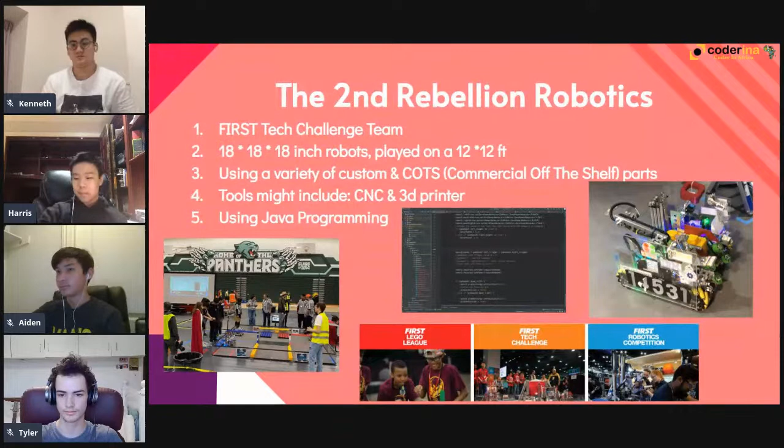So this is our engineering notebook. As Ken briefly mentioned, there will be another workshop about it. Right now I just want to mention how we use the engineering design process to successfully build a robot.

In First Tech Challenge, we do need to submit an engineering notebook, very similar to First LEGO League's engineering notebook. Starting from the top left side, there are sketches of our possible robot designs, where we need to start brainstorming ways to manipulate the objects. We use different methods to keep the best ideas, and then start on the CAD.

Lastly, you see images of competition bots with their descriptions. This is just to show how we have to describe how and why we built our robot this way.

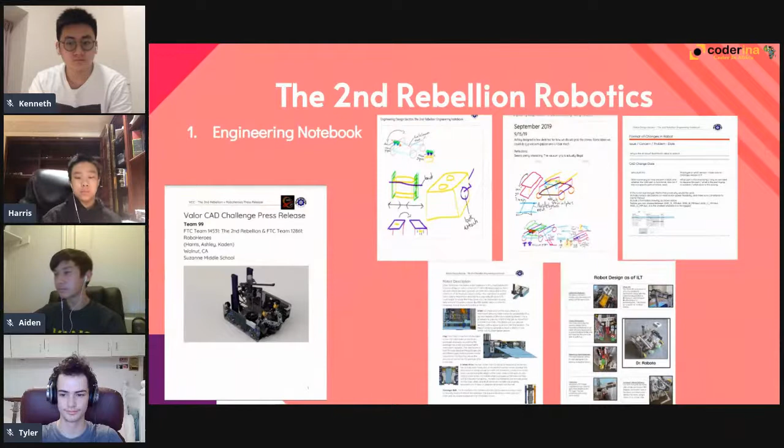We'll also show an example format for a basic FLL bot with the link provided if you want to build it in CAD. Lastly, we'll show a sample of how Virtual Robotics Toolkit links, but we'll go in depth next week since there are a lot of questions and intricacies inside Virtual Robotics Toolkit. And then we'll be looking into chat for any questions. Okay, next slide.

First on the list, we have Virtual Robotics Toolkit. It's a simulation program for a LEGO robot. Some features include the ability to pair up the motors with the software and then test the program directly inside the software, and make sure your computer-aided design model actually functions like an FLL robot and properly works.

Once you get into LDC, you'll see a similar screen to this. You go up here, click Preferences, LDraw, Search Library Paths, and you can see I already have it created here, but for you it's not going to be there. So you click New, and then click on the one that you've just created.

And then Browse Folder, and I have my LDraw download folder. It's probably in the same area, in local disk. Then you click on the entire LDraw folder, select the folder, and that's it.

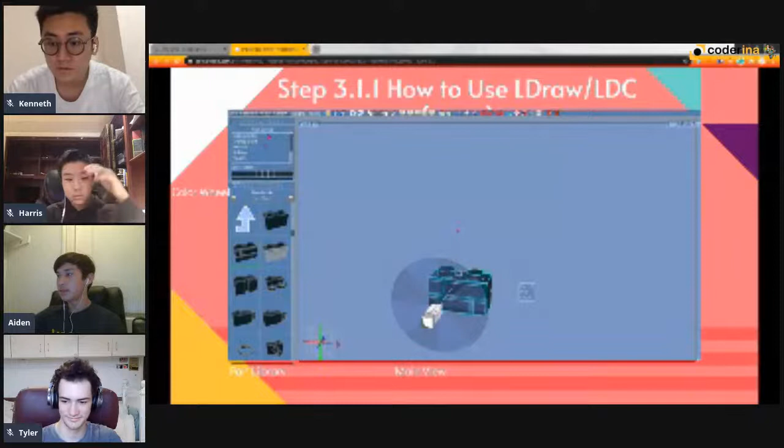So this is basically our LDC layout, or GUI. On the left side, top of the left, colors, and we'll go over a little bit more. Below you can see the library, which is divided into different categories, easily organized for you to go through. On the right side, the big box is where we actually are.

Aiden, I'm gonna have Harris share the screen. So Victory, can you actually change it to Harris for the screen? Hello. Slide. And over.

Do you see this? Hello, Aiden. No, it's not loading. Wait, Harris, can you hear my voice? Yeah, we can hear you, I'm fine, ready to screen share. Okay, I think your screen share is on there right now. I think Aiden, can you go back? Aiden's frozen. Is he okay? I'm just gonna... Aiden, can you hear? Aiden, you're lagging really bad. I think Aiden's frozen, so okay.

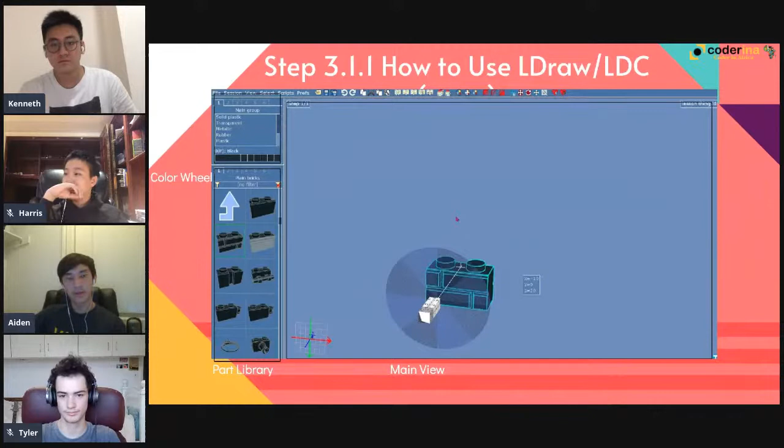So as you guys can see, on the top left is our color wheel, which Harris briefly went over, we'll go more in depth on that later. Below it we have our parts library, and each part is located in a specific folder, so it's very organized for you instead of like in real life where you'd have to organize all your parts yourself. To the right of that we have our main view, where you'll be building everything, where everything's being put together.

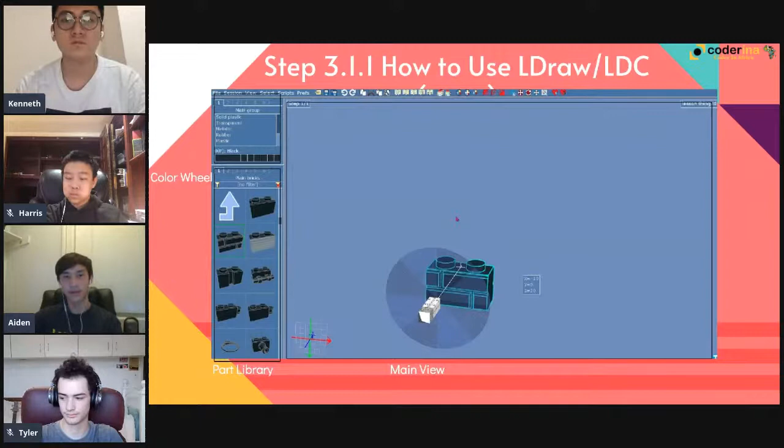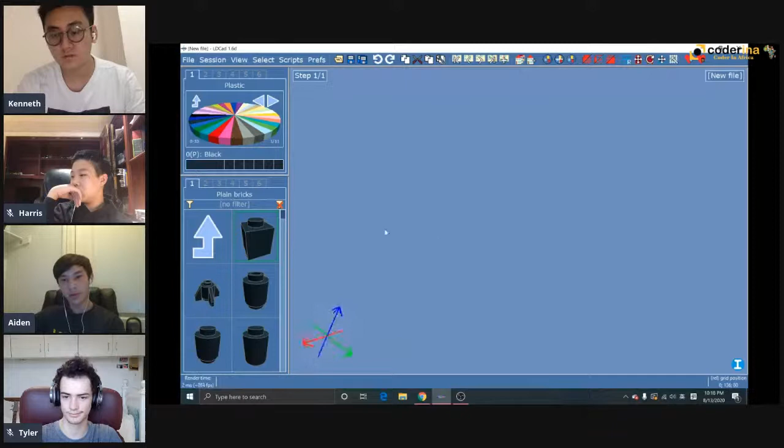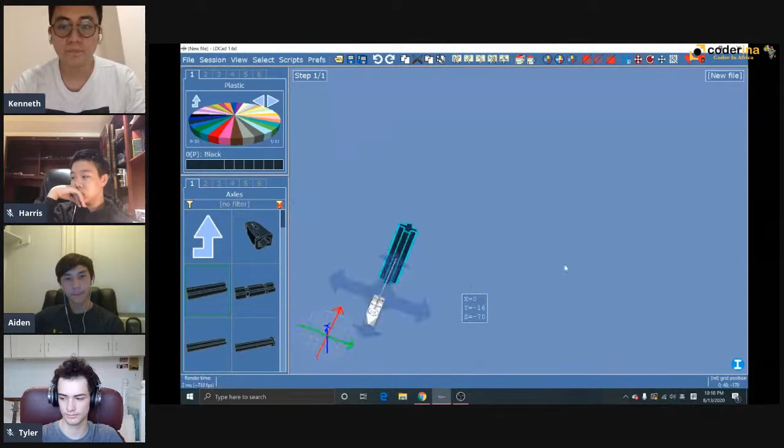To start a new project, click on Start New Model, and at the top it says Name, you can name it whatever you want. You can also add a description, but we didn't for this one. We have this graph thing at the bottom, and if you right click, hold and drag, you'll be able to move around your piece and view around it, choosing different viewing angles. This is just by right clicking and dragging. Another cool feature is in the bottom left, if you choose the one at the top, instead of moving around it, it will just move up and down.

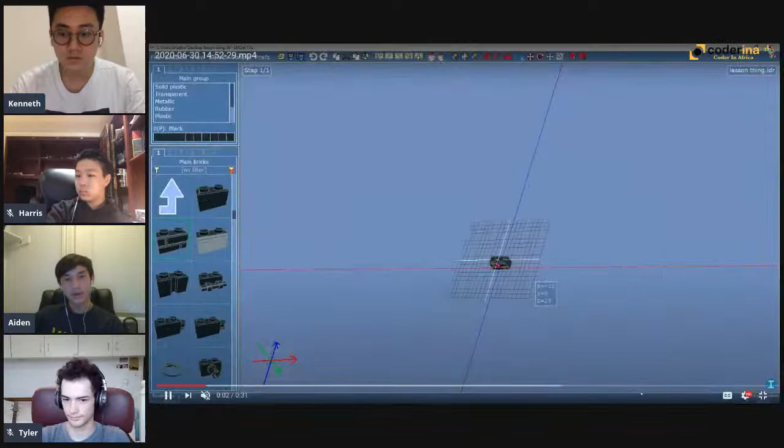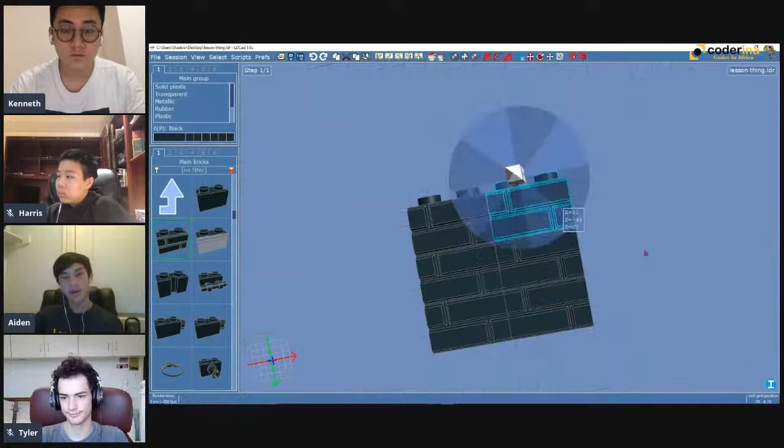Okay, so as you guys saw earlier, we're able to change the method of how we use the pieces. This is the grid method, which is what it defaults to once you download the software. Our pieces are automatically snapping together, but it's different from another feature called part snapping. This is basically where each piece is on a grid, and there are only a few specific places they can actually go, which is how they're able to snap together so easily.

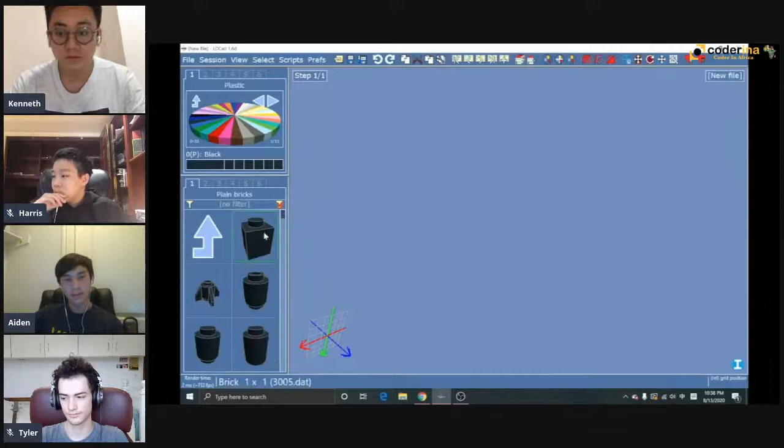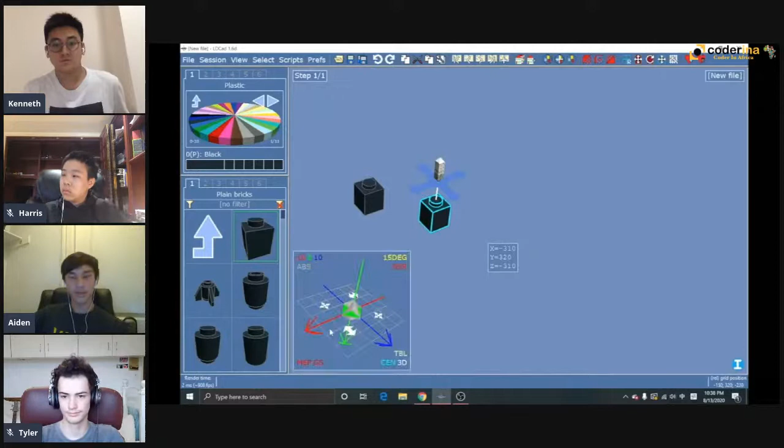Now this is part snapping, which you access in the bottom left. We go through our parts first and take out a piece, then go to the bottom left where you can see two important options. If it says enable or disable the auto editing plane, that means if you disable this you'll be able to move your piece freely without the grid, and part snapping will make it so once you go near a part, the piece automatically links to it like a magnet. As you can see, I'm able to move my piece freely, and if you turn off part snapping, it will not go to the other piece. So probably use either the grid method or part snapping to easily put your pieces together.

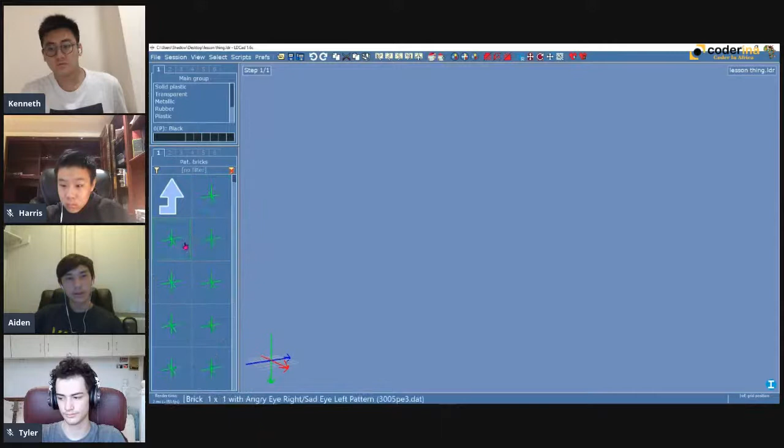Okay, so as you can see, we have our parts library here. And if we drag out a piece... So you have all of your different libraries here, but you might be wondering, where do I get to the FLL parts? That's on this gear.

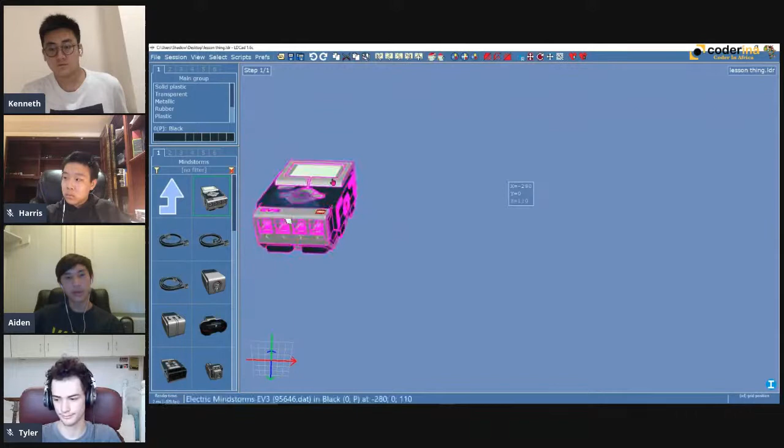So you go through here and you click on this gear right here. And that will bring you to, or no, you scroll down and you click on the EV3 brick. And it will bring you to this. So then you're able to drag out your brick, and this, as you can see, there's like a wheel here, and you can use this to rotate your piece.

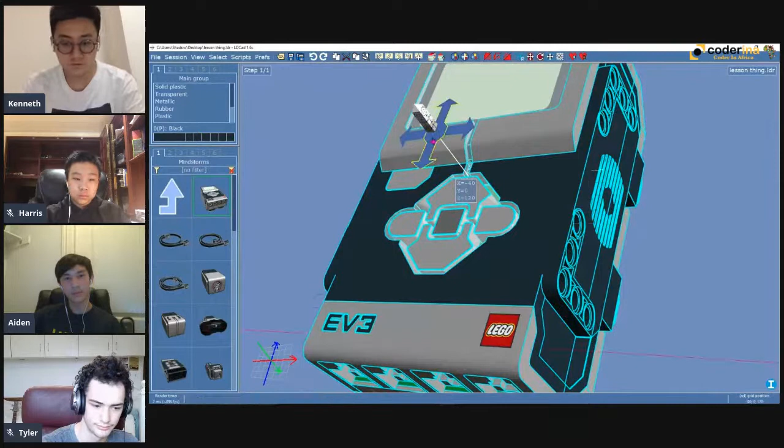And this is one of the key features in LDCad. And we have our rectangle here. So the middle one is able to be, you can move the piece up and down, left and right. And the bottom one in this little rectangle moves the plane. So let's say you want to move your piece to a different position without changing your viewing angle of the piece. That's very useful.

So next we're going to go over how to use submodels. And if you don't know what submodels are, or you haven't had experience with them, like in Onshape, Fusion 360, Inventor, or SolidWorks, which are other CAD softwares, you're able to create these things called submodels. Now, LDCad is different because it automatically groups the submodel as one part. Unlike other CAD softwares, submodels don't automatically update in a model.

So basically what submodels are is, let's say you have your drivetrain, which is like your motors and your wheels, and then at the top you want to have your brick and maybe some like an arm or something. So instead of building those two things on the same project, you can actually combine them into one, which can be pretty unorganized otherwise. So next slide.

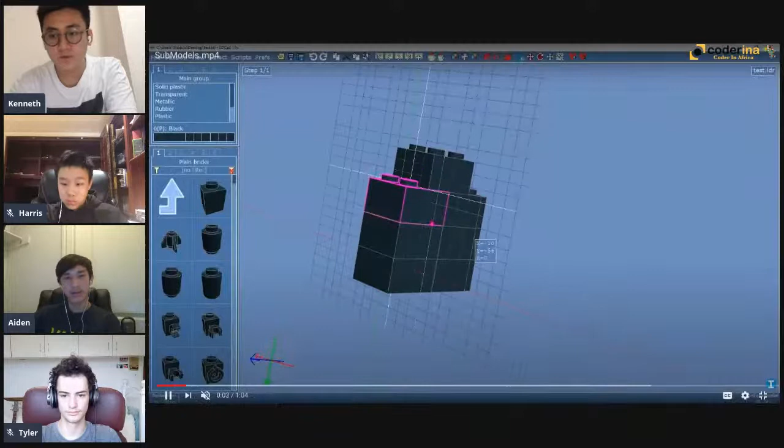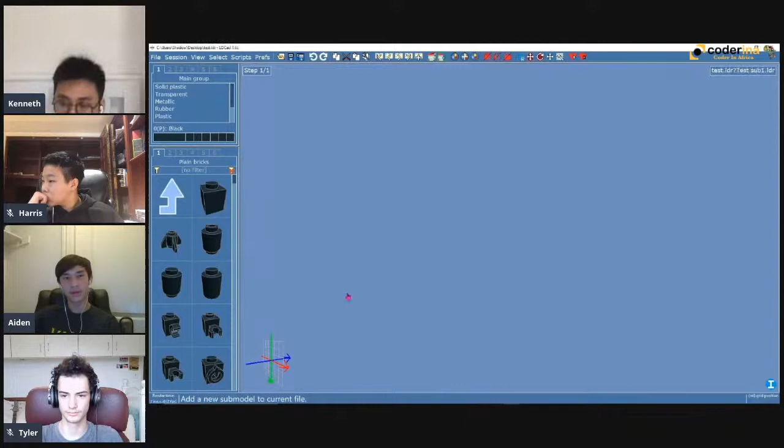So let's say you have your piece here. This is the piece that you've created. And to create a submodel, click the button at the top with the house and the plus. You can name a submodel whatever you want, it doesn't matter. And you can also name the full submodel or the full model. So the top is your submodel, and then the next one is your full model, what you're trying to create.

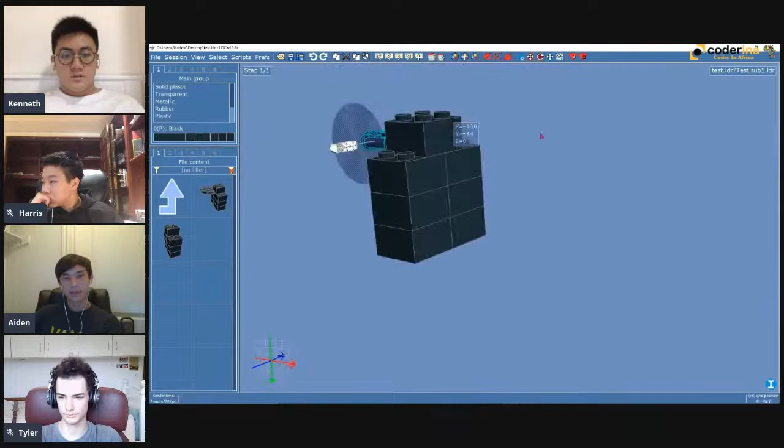And you might be wondering, well, where did it go? So I'm going to drag out another piece here so that we can have, so it shows it's a different project. So you click here and here, and then you'll be able to drag out the piece that we've just created. So I'm just going to feature some of the other things that we were doing earlier, so maybe you can get a feel of how some of the controls work. And there we go. Okay, next slide.

Okay, so this is our LDRAW wiring. So as you can see, you can pull out the wires from your software, and then it will automatically... so the first thing you need to do is make sure that part snapping is on. Now we showed how to do that earlier, and that will automatically make it so that your wire will snap into where it's supposed to be.

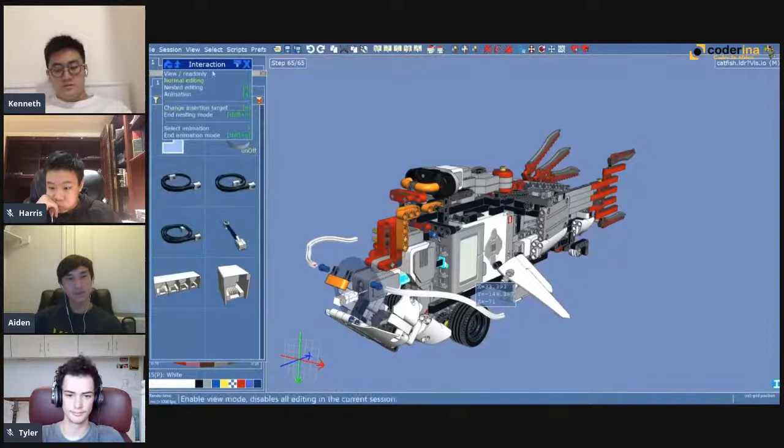And then now you might be wondering, well, the wire just moves as one complete unit, so how would I plug it in to, let's say, the motor up top? So the thing that you need to do is go to Session, and then click Interaction, and then enable nested editing.

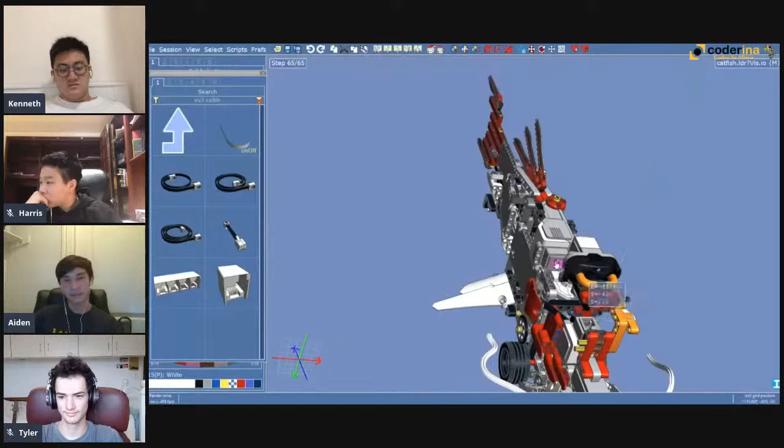And once you do that, you'll be able to just select one of the ends of the wire, and you'll be able to move it. So it'll flex around, and you'll be able to move your robot around. And then using the wheel, you can rotate it, and it will automatically snap into place. Okay, next slide.

So to save your work in LDCad, it's pretty simple. All you need to do is go to the top and click. Wait, can you restart the video? I think I missed the first part.

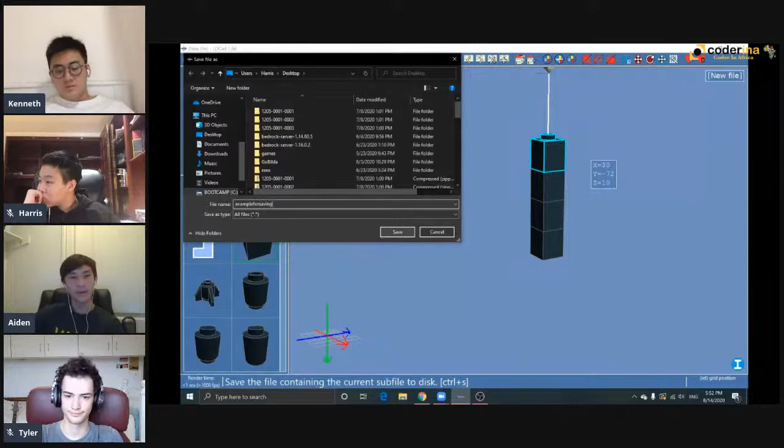So just go to the top and click this button where you play. Go to the top, click this button up here. It's a blue button, and it'll bring up your folder. You could make a new folder specifically for LDCad projects, or just put it on your desktop. It doesn't matter where you put it, but I recommend having a specific folder for each project, just a place where you can put all of your models. Then you click that folder, type your name, and click save.

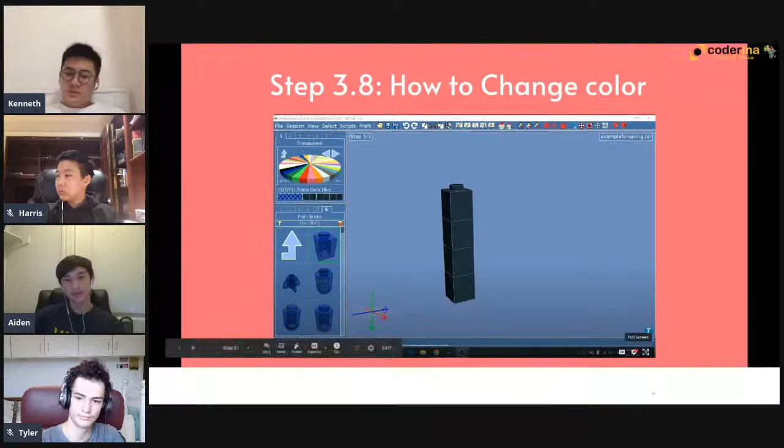So now we're going to go over the color wheel, which we saw earlier. We have our wheel up top, and you might be thinking that's different than what we were on before, but that's just because we selected one of the things. We selected transparent. As you can see from the parts library below it, we have all these different colors, and below we have selected blue. So transparent makes the pieces look like this, transparent. I kind of like this effect because you can see through the pieces. It looks cool, I think.

You might be wondering, how do we get it to not be transparent? Right now we're selected on only transparent parts. But if you want to go away from transparent, click this back arrow, and you'll see we're at what we were at before. So we have solid plastic, which is what's here now, just the solid black color. We can basically choose any of these - solid plastic, metallic, there's a bunch of different options, and I recommend experimenting with some of these.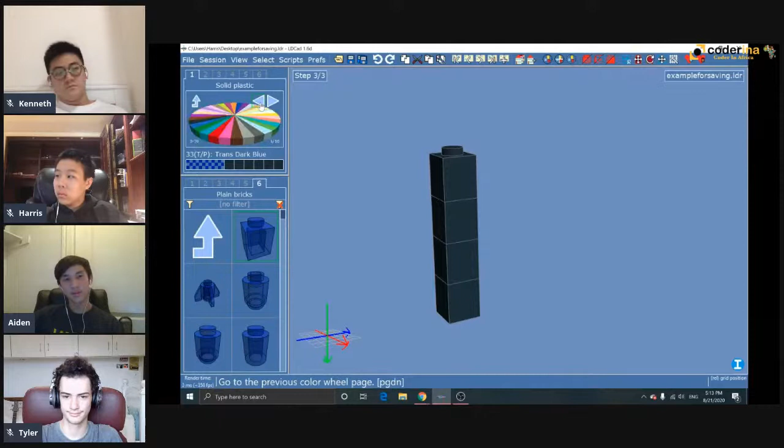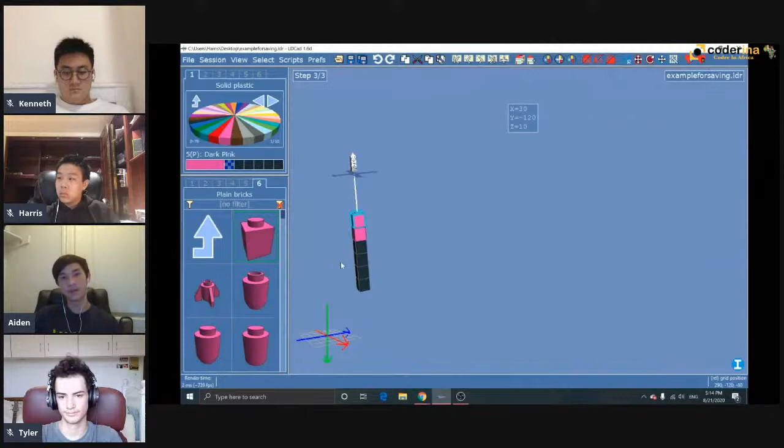You can see in the parts, or in the colors wheel, that for solid plastic there are a lot more options for colors. Whereas transparent, you only had about 2 pages of the wheel. With this, you have 10 - a lot more options to choose from. As you can see, there's a little bar under our color wheel. What this does is let you hot swap between specific colors. So let's say you're swapping between black and red parts - you can click one of the boxes and choose red, so you won't have to go through each color wheel page and choose red and black every single time you want to switch colors. That's just for convenience.

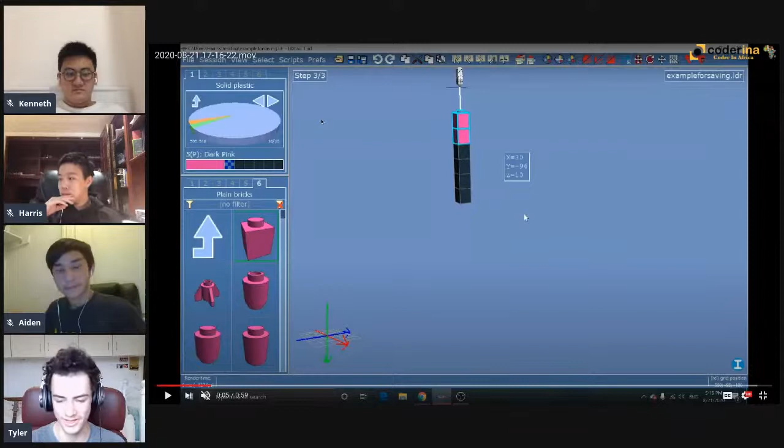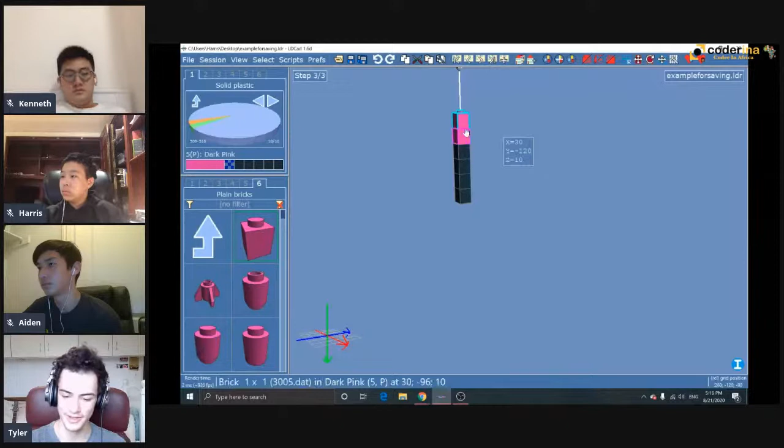Okay, so now you might want to hide your pieces. Say if you're building something behind your pieces and you don't want them to be there so you can see what you're doing, you press this little red square, and once you've pressed it, you just have to press a cube and press it again, and that'll make it disappear. The piece isn't gone, it's still there, but you just can't see it at the moment. This can be useful in many ways. If you click this button, it'll revert everything back, and you can click as many as you want to make them disappear. This is useful because, say you're trying to wire something and can't see where to put the wire - if you make a couple of the blocks invisible, you can see exactly where it is, and then all you have to do is press one button, and they're all back.

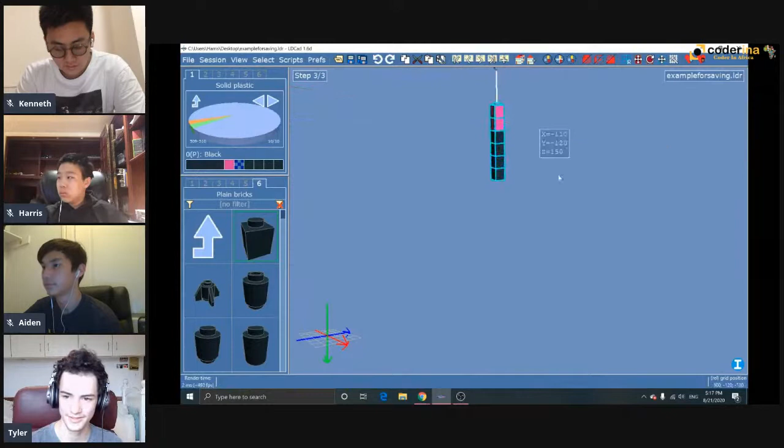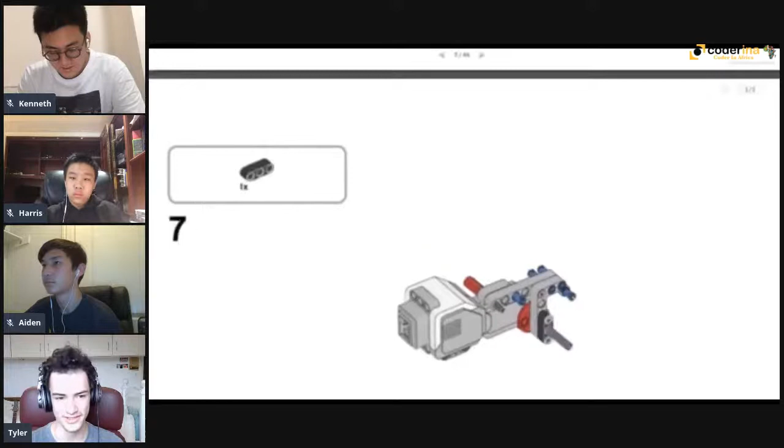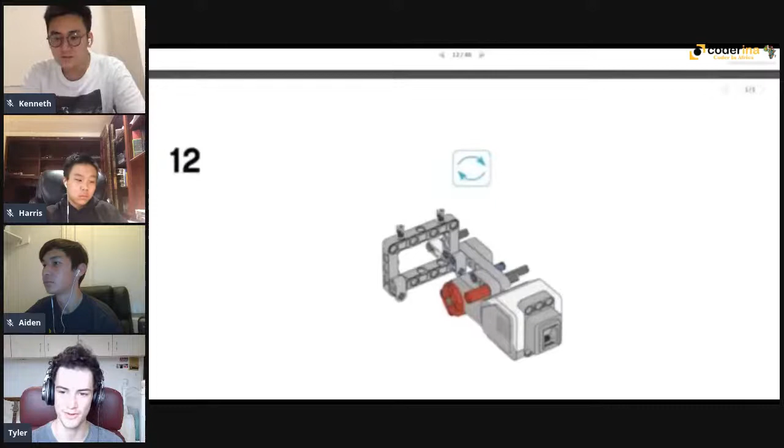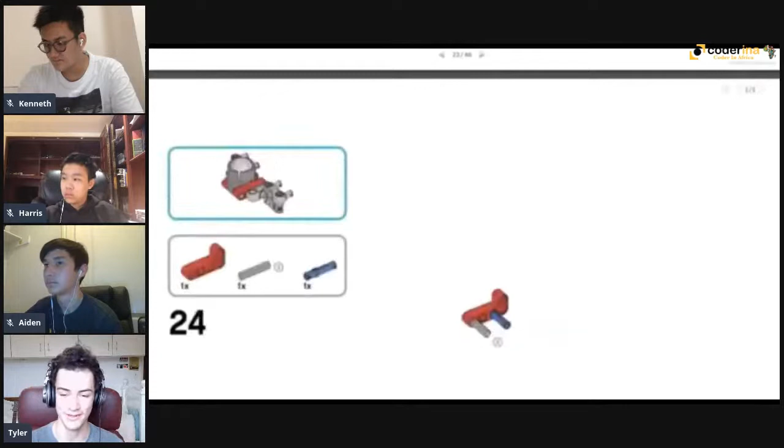This is the base robot that comes in every EV3 Mindstorms robot brain kit. When building this, it's just instructions on how to build a robot. But this is one of the examples where you would use one of those submodels, if anyone was confused. Once you finish one of the motors, you would create a submodel for it so you could come back and copy and paste 2 of them, so you won't have to build both at the same time. You don't have to build the base robot - because there's no actual Lego pieces involved, you could build anything you want, even things that aren't technically possible in the real world. I don't know how well it'll work, but the creativity's there. You're not limited by how many pieces you have, or by logic.

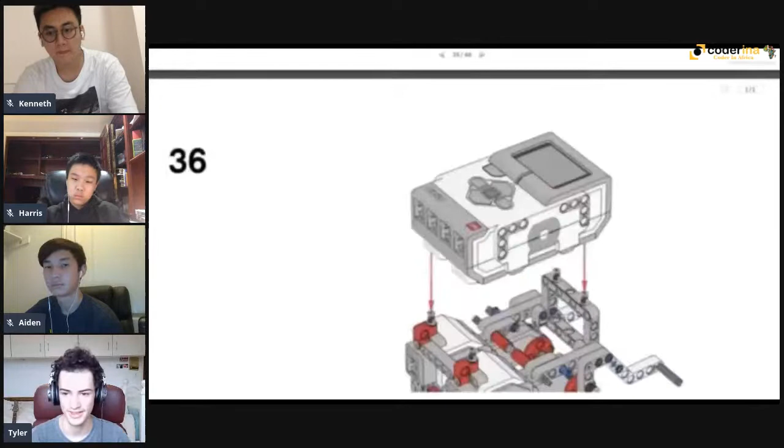So here we'll show you again in a tiny bit - there's going to be another example where you use a submodel right there. So you would probably save that as a submodel, so if the program accidentally crashed or something, you wouldn't have to redo it. The rest is pretty simple.

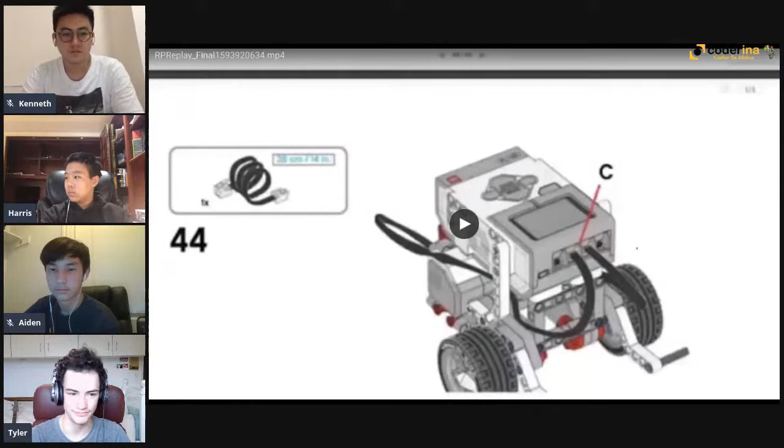Okay, so this is how you import your robot from LDD to VRT. You're gonna go up to File, and then press Export Model, or Control E on your keyboard. Once you've done that, name your robot. We have it as Sirius 1.2, and change it from an LXF file to an LDR file so that VRT can actually read it.

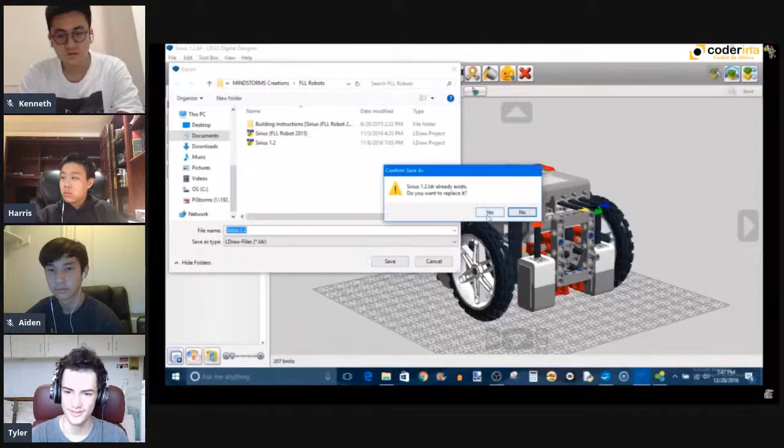I don't know why it starts out as that file, but it just does. Once you're happy with the name, press save. If you see this warning, it means you have something else named that, so you either want to change the name or replace it.

Now that we're in our VRT software, you get started with EV3, and it'll show up on this little map. We'll show you how to do all this later in a couple next slides, and next week. We're gonna have a base robot there, and once you log in, you always have a robot, but we do not want this because we import our own. So we're gonna delete the character or actor and import our robot.

So we can see Sirius 1.2 is the robot we just exported. It's right here, we're gonna click it, and we're gonna import.

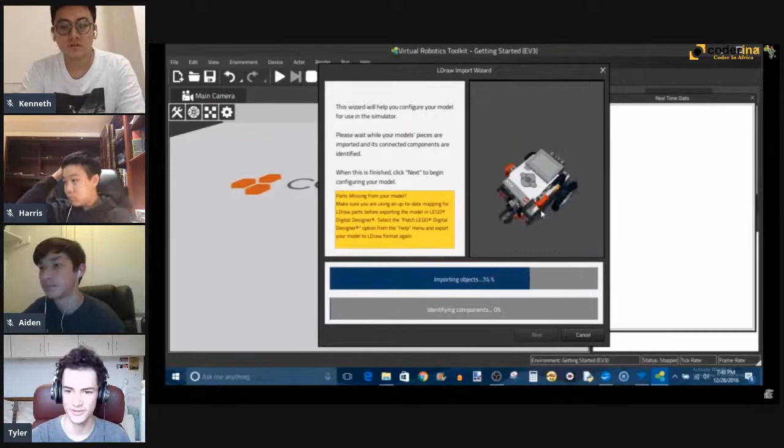Okay, so this is just loading. It takes a while for it to load, and it shows every piece that's loading. If you see this notification, it means your LDRAW library isn't currently up to date. You have to decide if you want to continue or not. Ours is at 99%, so it's probably not a big deal.

But if yours is lower, like 50% or something, you're probably going to want to update it. So we're just going to ignore it, pretend it doesn't exist, and it'll continue to load. Once it's done loading, you're going to press next.

Okay, so now we can see our robot, all our wires, and all our components. If you just wanted to scrub around the robot, you can do that. Can be fun. But we're going to see the components.

So we're going to click component 1 main, and we can see what's green - that's what that component is. So we're going to name it chassis. What the component does is everything that is green there will move on its own.

So this one down here is the ball caster, which means it will move independently to everything else. It just makes it easier if something's rolling that you can control it by itself instead of it being tethered to everything else. So we're going to name this one accordingly as ball caster.

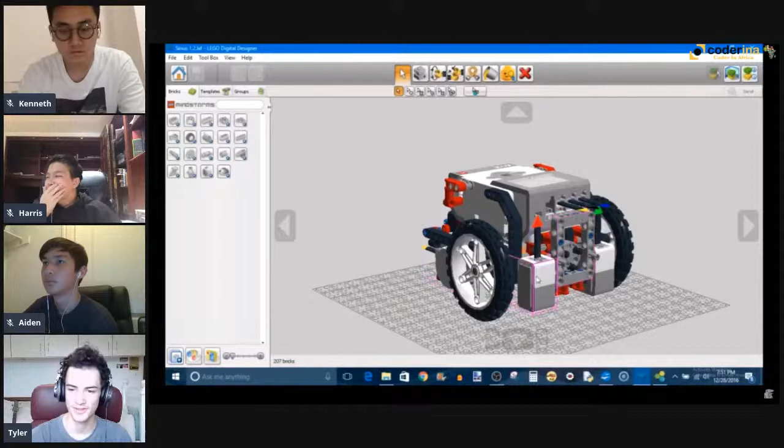Okay, so now you might be wondering what these cable ends do. In LDD, the cables don't actually have any means to connect to each other in VRT, so VRT actually doesn't know what the cables are and what they do. So you're gonna have to specifically tell them where they're gonna be going.

So here you could just click it and then go to this drop down and connect it to the chassis. You're probably gonna want to connect every single one to the chassis, unless you have a motor connecting to a motor, which I guess you can do. But you can't click all of them at once - you're gonna have to do it individually, but it does save your last choice, so a slight bit of convenience there.

Okay, once we've done that and we're happy with the naming scheme, we can press next.

Okay, here you can see our color sensors, all our servos, and then our motor ports and sensor ports. So we're gonna start with the color sensors and name them - this is for simplicity when coding in the future.

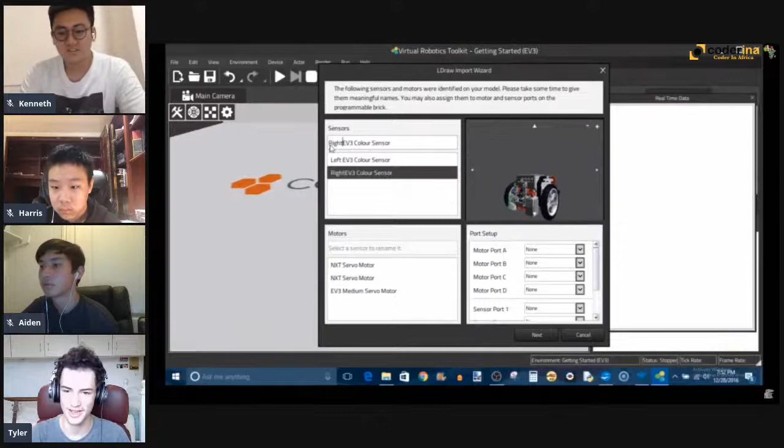So you can see this is our left one, so we're gonna name it left, and the other one's gonna be right. Again, when you're coding, you probably want to name your motors so you understand which one you're coding, so you don't end up having everything backwards or whatever. So we can see this is our left NXT motor, and we're going to name it accordingly.

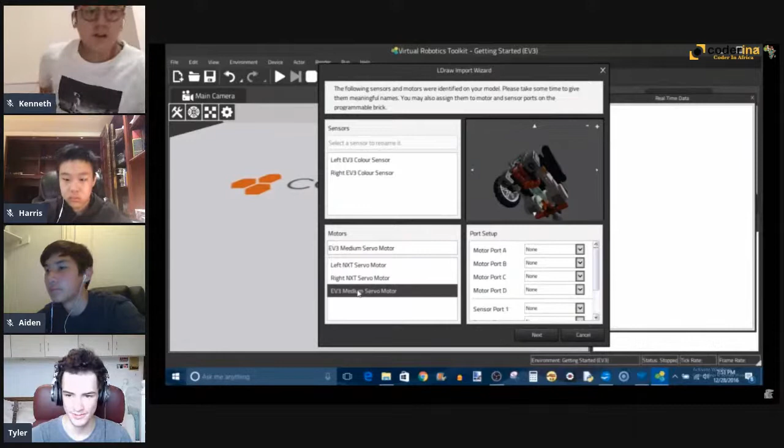And then the next one is going to be the right NXT servo motor, and we'll name it accordingly again. The last one is an EV3 motor, and because there's only one of them, there's really no need to be naming it, so we'll just keep it the same.

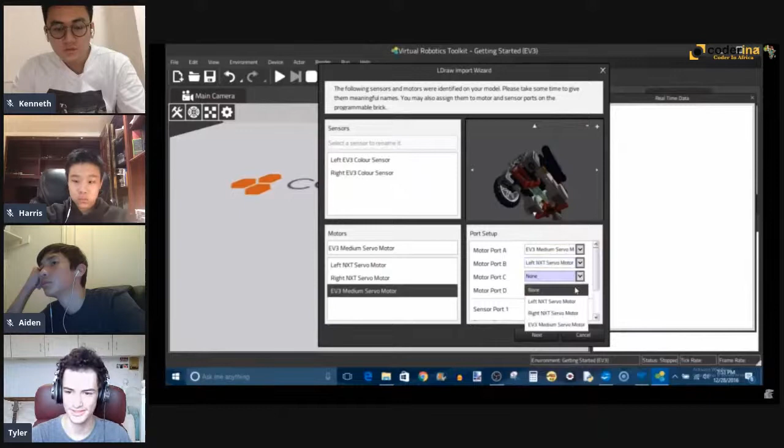Now this is where the cables matter, because we'll be putting in which port we want to go into. So this will be the EV3 port for the EV3 motor. This is so when you're coding, you know which motor goes into which port, so you don't end up going backwards or doing whatever. So we'll put our color sensors in, and then once we're happy with our selections, we're going to press next.

Okay, so this is where we're going to have key combinations. You're going to press that if you want your own custom key combinations, but we'll go into how to do presets in just a second. So we're going to have key A, and we see this drop down. We have up, on press, and on release. So you have options when you want A to register. We're going to have this be down, so whenever A is down, it'll complete the action. We're going to do 100% speed, because every time we want to click A, we want to go at 100% speed.

And then we're going to do next key. This is where it might be a bit confusing, because we're going to do A again, and when it's up. So this is once you release it, 100%, it's not going anywhere, it's not doing anything. So make sure that doesn't mess up. But we don't need those, we're going to delete them. This is the presets.

So you see we have a left wheel preset for WASD, arrow keys, and a game controller. And then we have right wheel presets for the same thing. This is very easy, very simplistic. So we're going to click WASD, and you can see it does everything for us. Both W's, so go forward and then stop. It just does everything for you.

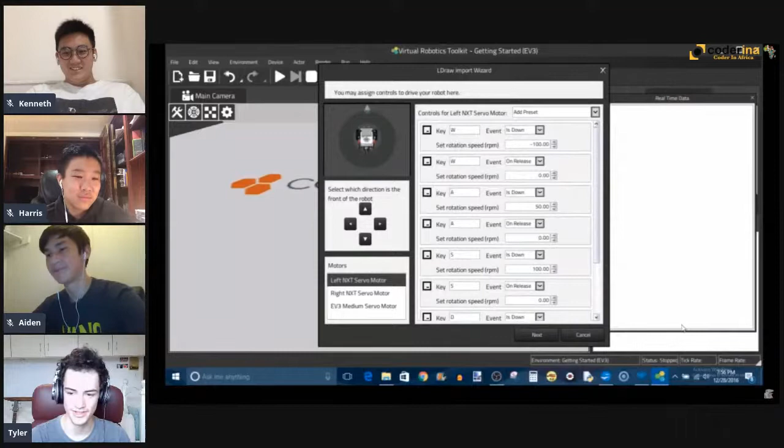Okay, so something nice about the software is that you can see here our motor is upside down, and usually you would have to tell the robot that it's upside down, but VRT software already knows that it's upside down, so it'll already do negative 100 for you, so you don't have to specify that.

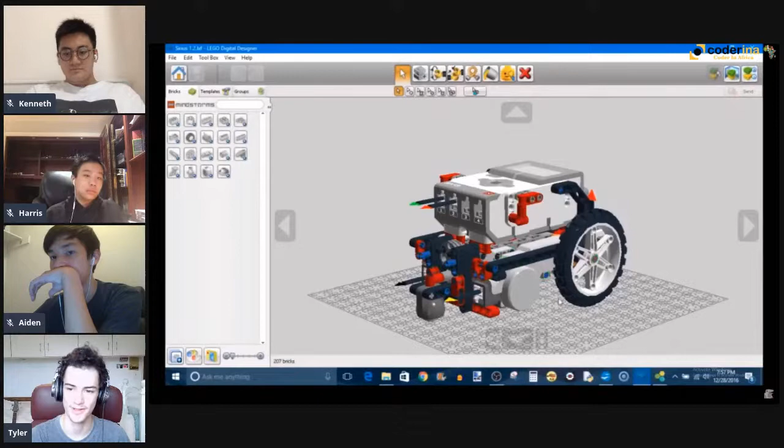So once we're back into the software, and we're happy with the selection that we choose, we could still add keys and whatever. We'll go to the right one, where we're going to do the same thing. We're going to add a preset, and that preset's going to be right wheel WASD. Same thing, everything, keys the same.

And then you might be wondering what these arrows do. That's for orientation. So if you built your robot in LDD and it's backwards, you could orientate it here so that you're not going backwards, left to right when you meant to go forward, right, left.

And then this is where the custom key combinations are really useful, because we're going to do this one as X, and it's down at 100%. Because there's no real key combination for this, we can choose any key on the keyboard that's not already being used as one that we can do. So we'll do X at 0, and then we'll add a new one and do C at negative 100 and 0.

Again, the 0 part is to make sure that once you release 100%, your robot won't mess up. And this one will be at negative 100, so you could do the reverse of it. It's usually for an arm or something, where having forward and backward different controls would be useful.

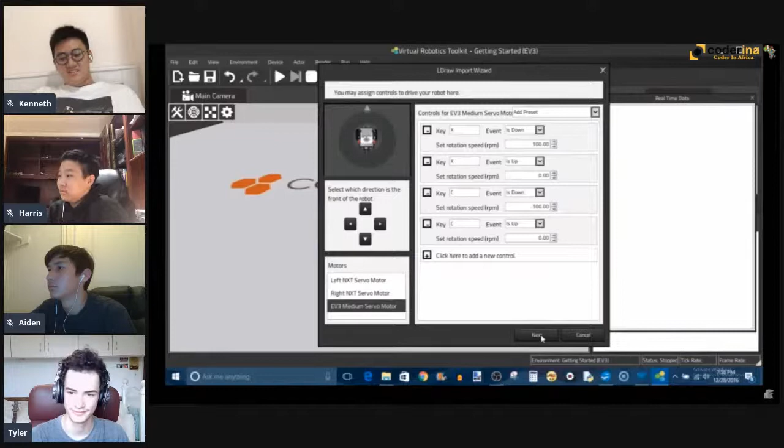And we're going to press next once we're happy. So our model is being loaded in, this takes a couple minutes, so we just sped through it because it's not very interesting to watch. Once it's done, we've pressed finish. Your robot might be on the ground, not a big problem, you just press these arrows and you drag it up. And now you have a robot that you can play around with, do anything with in this sandbox map.

Okay, so this is the intro to the Virtual Robotics Toolkit. We'll get more in depth next week. This is just a starter.

So we can see here, that's the file button that does that. And we're going to press the EV3 map sandbox. You could do any map, but we're just doing this one as a demonstration.

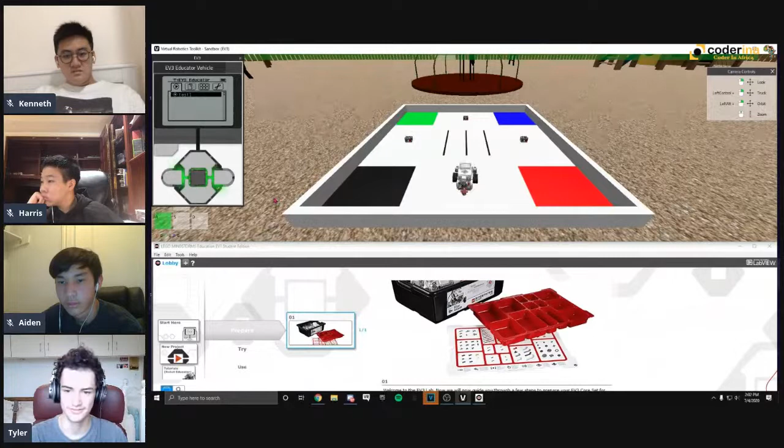So you can see we have the Mindstorm app open as well, and we're having a split screen so that we could code and look at the simulation at the same time. Once you press the play button, you could do WASD, and these are the controls we said earlier, and we can move the robot around, do anything.

So it's now driver controlled, so it's not coded. But if you want to code it, we could do new program, and you select new program, and then it's the same thing as you would normally use for a normal robot. Everything's the same, it's the same program. You even have to press download, even though it's a software thing on a software thing.

So then you have to navigate your brain, same thing, and you'll navigate to the program you want, and then you press the brain and it does it for you. So it's exactly the same as you would have it if the robot was physically in front of you. Everything is the same.

And then that's the button to reset and add more code. You have to reset it before you add more code, but that should be fine. And here we'll make it do a loop-de-loop or whatever, or spinny spin. We'll download it and we'll find the program and go.

Okay, next slide, I guess.